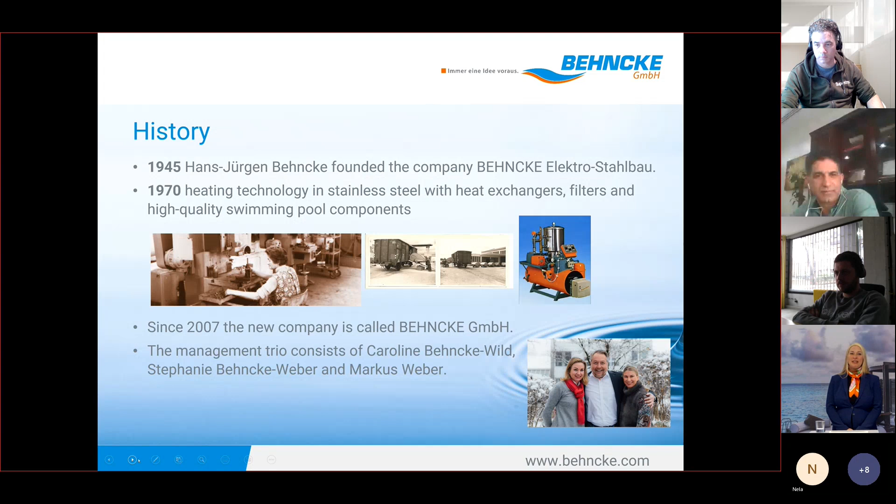We started here, where I'm actually standing in this building, in 1945. You see we have a very long history. In 1970 we started with swimming pool equipment. Nowadays, you see a little photo below of Stephanie. In the middle, well, we have to let some other people in - I think that's why we have that mouse confusion. Please go back one slide. Anyway, I'll make it without the presentation, you just see me. We started in 1970.

At the time we already produced heat exchangers and filters made from stainless steel. There was a photo you just saw of Stephanie, Markus, and Caroline - these are the owners of the company. Caroline is responsible for after sales, Markus is responsible for customer relations, and Stephanie is responsible for prices and human resources. These three together, two families, have six children.

And six children can wait for a very nice new building, which is very much in progress at the moment. We are moving from this place, where I am at the moment, five kilometers away - we are here very close to Munich. All the storage, production, and the office building will be moved, and we are going to open in January 2024. Down below in the office building you can see the training center. You're always very welcome to come visit us, and we run trainings.

It'll be very nice in the new building - we have a pool, everything. Then the 2nd and 3rd floors are offices, and the 4th floor is like a relaxation area where you can actually see the mountainside. So please come visit the new building and get an impression of what we are.

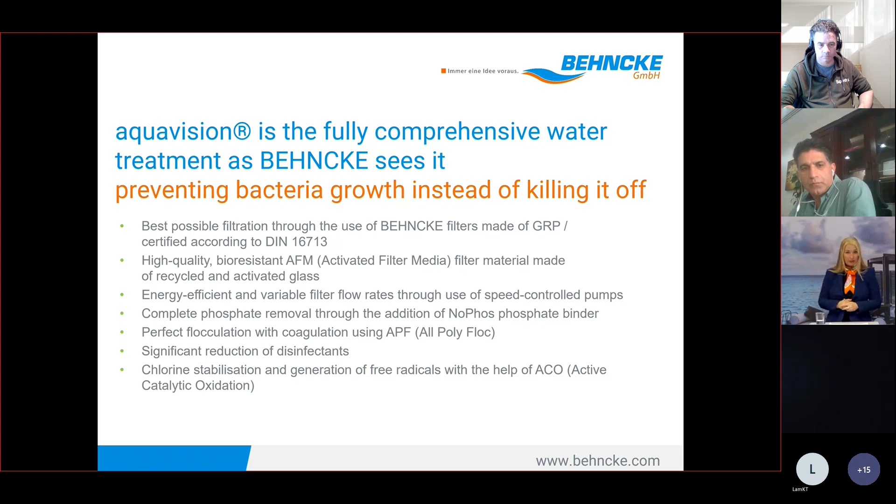And we work with ACO. That means we want the part of chlorine that we need to stay in the pool, not have the sun take everything away. So that is the prevention of bacteria.

Next, we have a pyramid: 60% is done with filtration, flocculation, backwash, and hydraulics. Why is the 60% so important? Because we work on that 60% - if this is very well done, you already have pretty good water.

Of course, you do need some fresh water - this is something we cannot avoid. And here it's only 10%, but nevertheless an important part: maintenance.

Maintenance means you have to take care of your pool. It's not like you can just say, I have a cleaner and that's it. No. I remember my dad, when I was little, we were driving in the car, and he would always say, silence.

And silence meant everybody had to be silent. My dad was quite rough. And then he would say, do you hear the noise? And everybody would say, yeah, maybe a little bit.

We have to find it - this is how we treated a car, and it's only a car. So you really have to treat and maintain your pool, because you're actually going in with your bodies, with your children. It does need maintenance. And 10% chemicals, yes, they are needed, but it's not that we turn the pyramid around and say, we put 60% chemicals and then it will be all right. This is not how we work, and this is the basis of what we do.

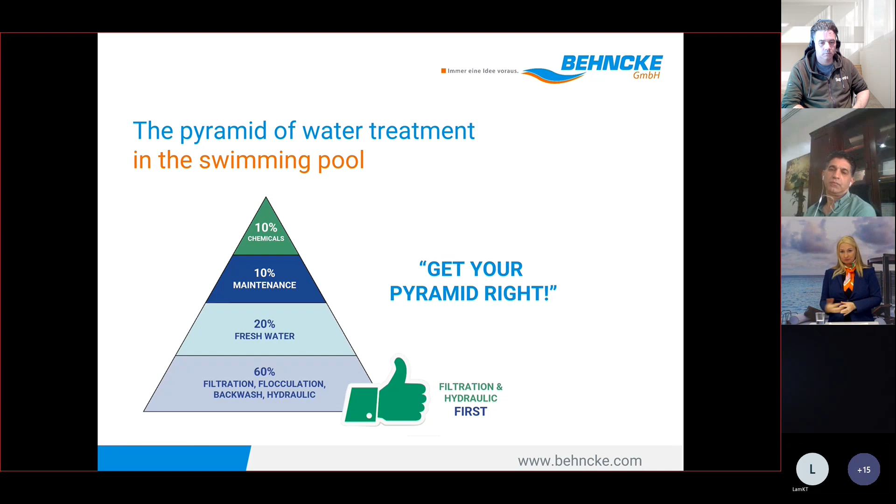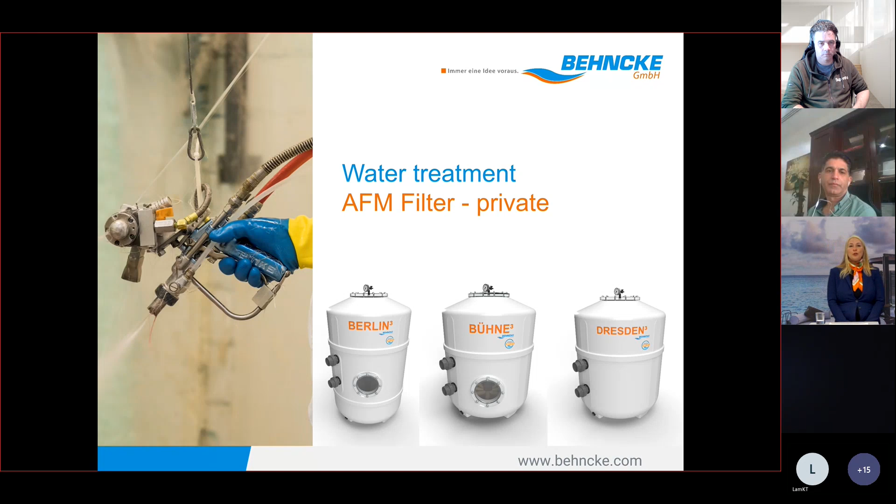So we come first to the filters. We have a new filter series: Berlin, Bühne, and Dresden. I would like to show you this. But first, I would like to show you a video from the production site, which is, as I said, in the center of Germany. I really want to give you a good inside view of how we manufacture our filters.

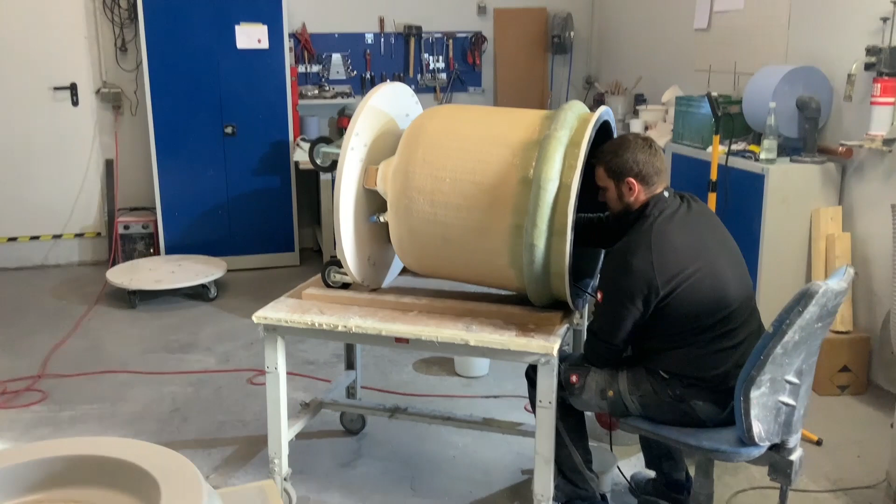Come on, let's start. Now we are in the mold making area. The life cycle of every pressure vessel begins in this small area. Up to 4 employees are responsible for the maintenance of the molds, but they are also responsible for building new models with improved properties and adjusting models according to customer requirements.

The individual filter components are manufactured using various methods, such as fiberglass spraying. However, wrapping or hand lamination is also used, depending on the container type and requirements. Fiber spraying, as shown here, is carried out exclusively by trained employees with many years of experience.

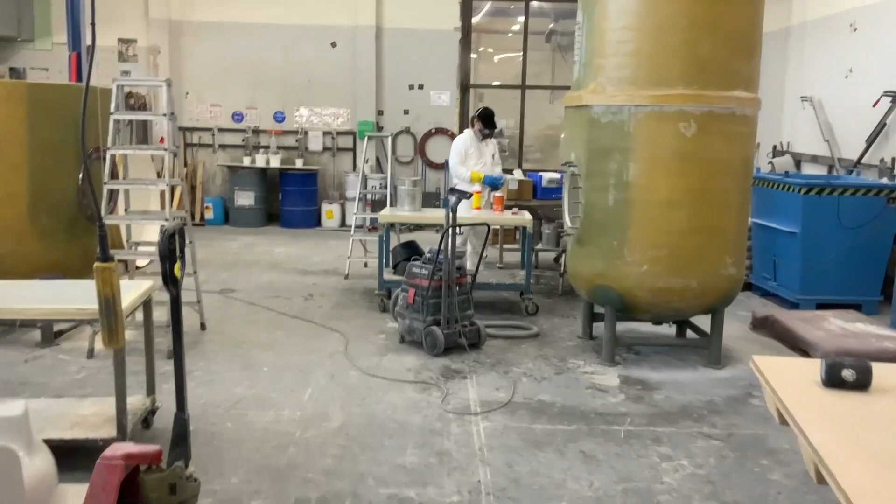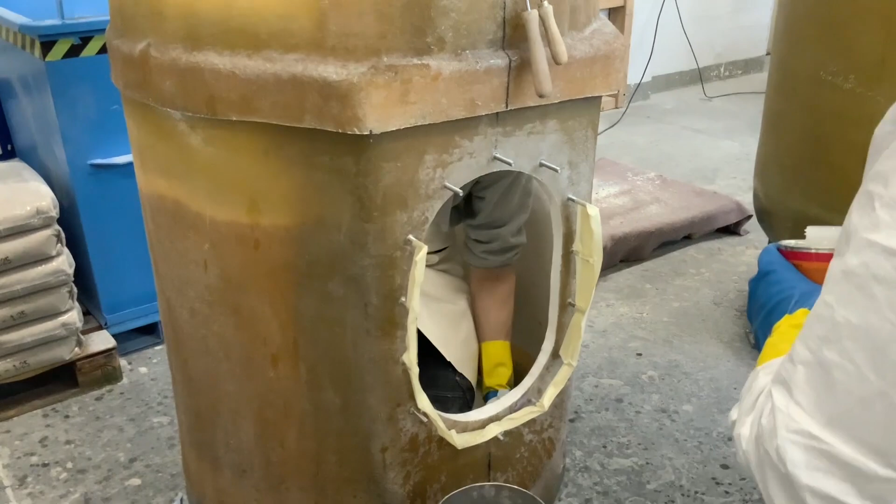Here we see the filters that are made for use in public pools or process water treatment. These exceptional filters are manufactured up to 3 meters in diameter, 4 meters in height, and 10 bar pressure resistance. Many extensions are integrated on customers' request. A split delivery and assembly is also possible and realized by our own employees.

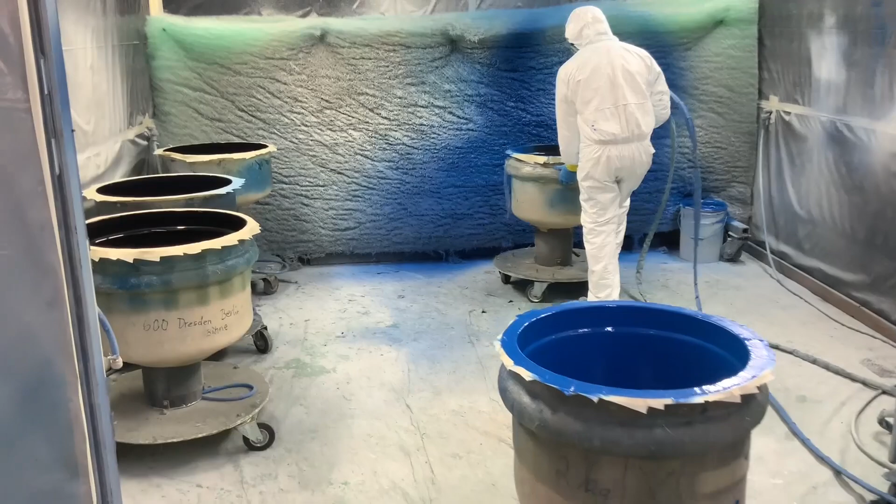Now we are at the start of the manufacturing process of the private filters. First, the colored gel coat is sprayed into the molds according to the customer's requirements. Then they come to tempering in a drying room. After drying, they have to be trimmed and pushed to the next process step, the fiber spraying. With the help of modern production methods, there is a possibility to manufacture 100 parts per day.

Even in private pools, more and more emphasis is being placed on performance. So some filters are equipped with a third component, we call it the jacket. This significantly improves the filter bed and smooths the filtration.

Unfortunately, producing the cylinders is also the most difficult of all manual activities. In order to achieve our high quality goals, additional reinforcements are modeled at the critical points. This is one of the reasons for the longevity of our filters.

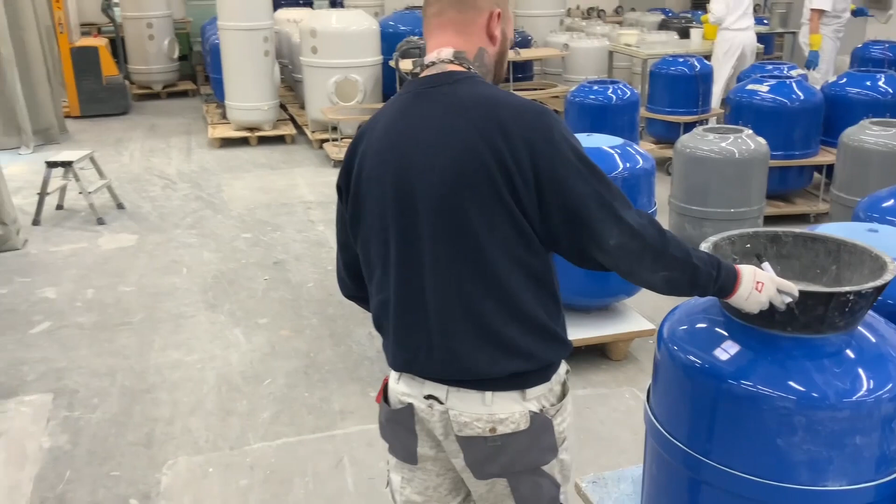In order to manufacture as efficiently as possible, the already prefabricated raw parts are taken from the assembly warehouse and pushed to the next step. Now, the individual components are connected to each other with a strong laminate.

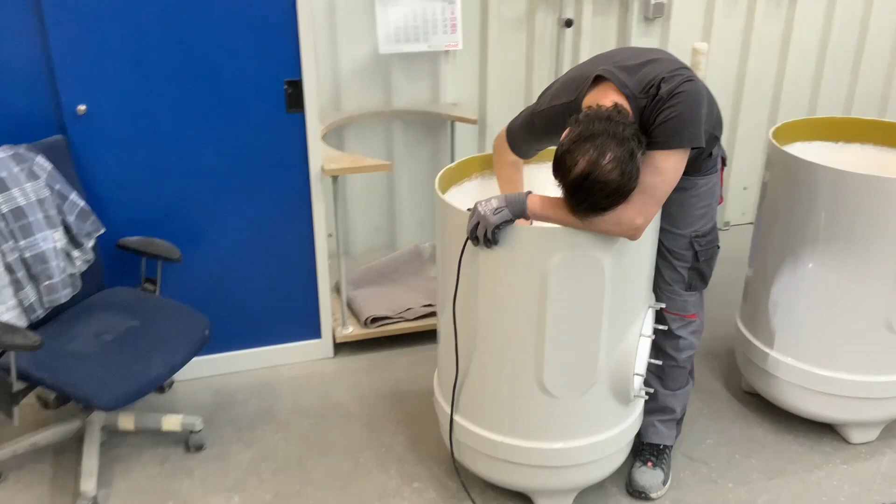That's what we call the wedding. Here, in just a few steps, a single component becomes a container. After the laminate has been vented, a protective layer is applied, which represents an additional barrier against chemicals or aggressive substances. Next step, the assembly department.

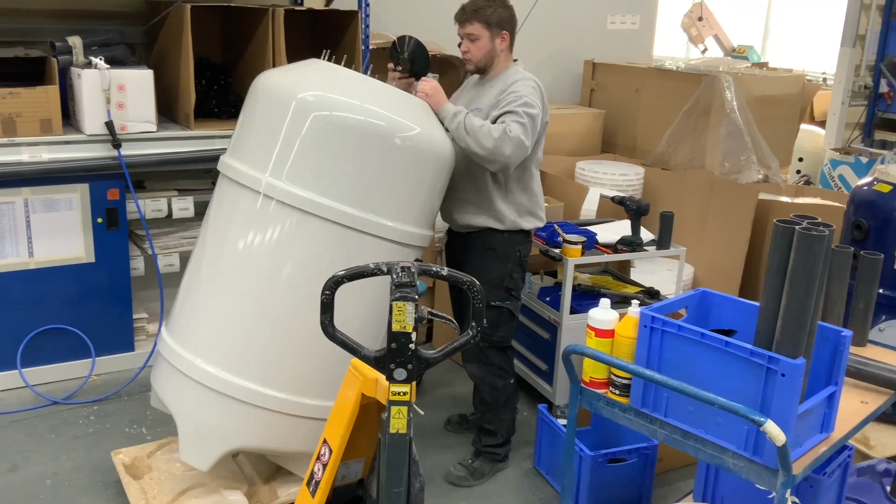Now, containers become filters. Depending on the type of filter, filter fingers or filter nozzles, connections and sight glasses are fitted. The rest of the pipeline is also installed here. Once the filter has been assembled, a valve and a pump are assembled into a filter system, depending on the customer's order.

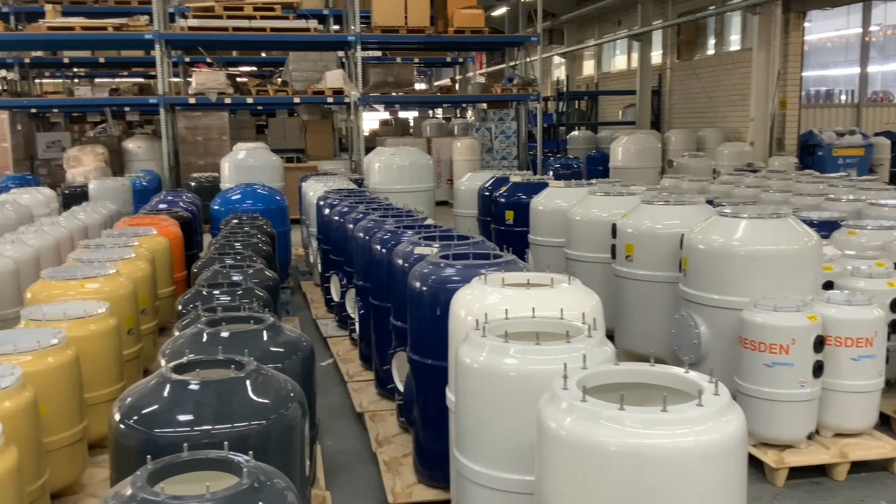Before we end, there's a little look at the site here. A production site which in its long history has increasingly developed into the market leader for quality products. A company that values health, sustainability and effectiveness. An organization for which a common, familiar and mutually respectful togetherness is important. We are all that, and we are all BEHNCKE. High quality products made in Germany.

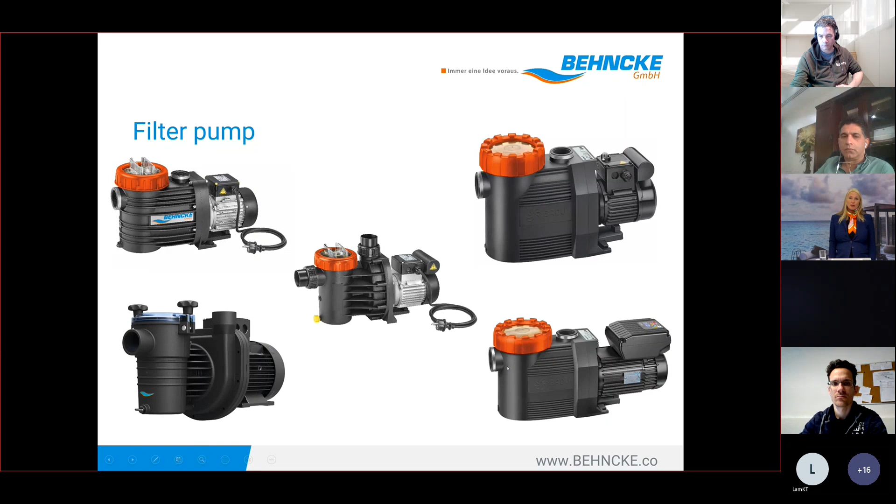So please use a speed control pump. And if you already do that, then also use a flow meter. It's like the same as the car thing - you're driving your car, you don't know how fast you're going, it's never recommended. It's the same in a pool. It's good to have a flow meter to know what the flow really is in the system. It's not very expensive, so you can add it and already have very good control of what is happening.

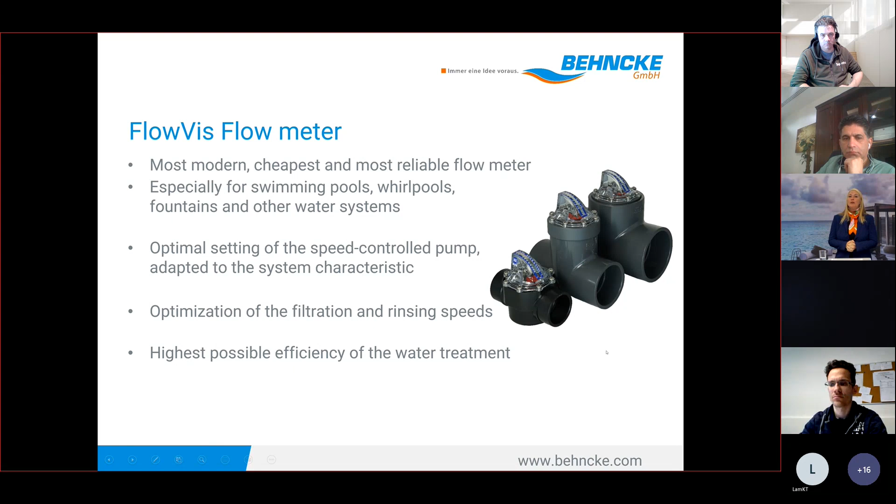We adapt from nature. We work with different layers of filter material in the filter, so the water really goes through, like in nature, to different layers, and they have super clean groundwater, ideally. That's what we adapt from nature in the filter. We go through different layers of our grains, so we get very pure water out of this.

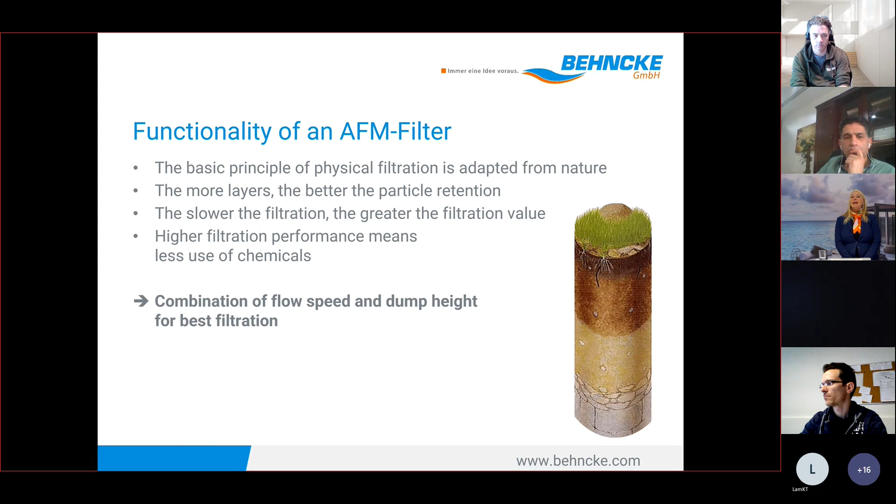Again, here you see it. The filter is not a balloon, it's not a ball, it is quite high. This is where all the filtration really happens, in all of those, on the inside. This is very, very important.

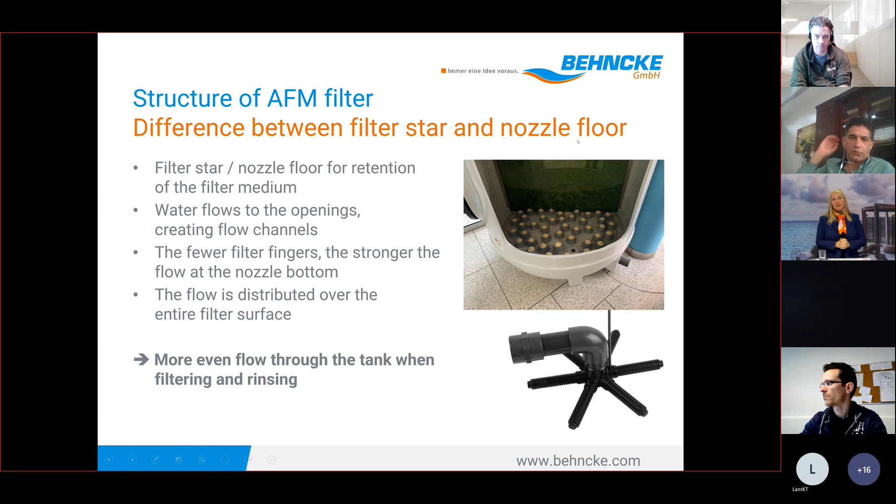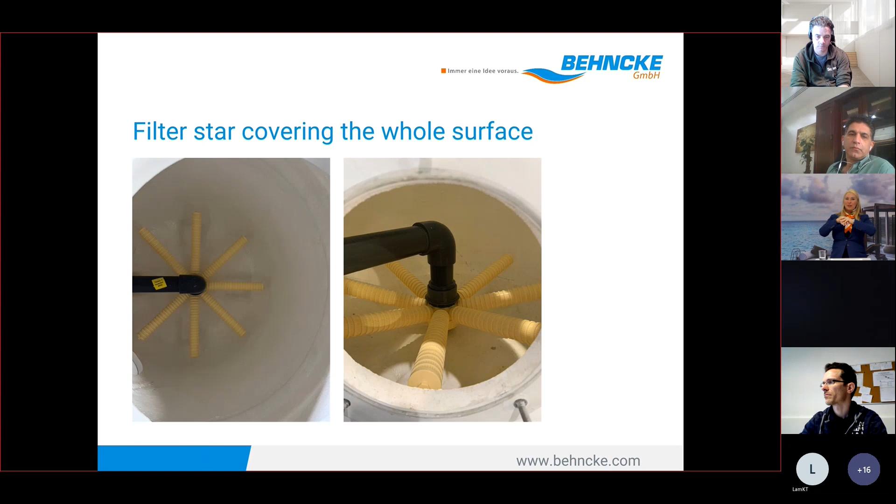Here I took a photo the other day when I was in the factory, and you really see it's covered all the surface, also with the laterals. Because we have a new series, I'll show you, they are quite big and they also cover all the surface.

Here's another inside view of the filter, that's what it looks like. This is the new series we are offering for very big private pools, or if possible for smaller public pools, from 920 or 970 dimension. We have for all of Berlin, Bühne and Dresden, we are offering this new series now.

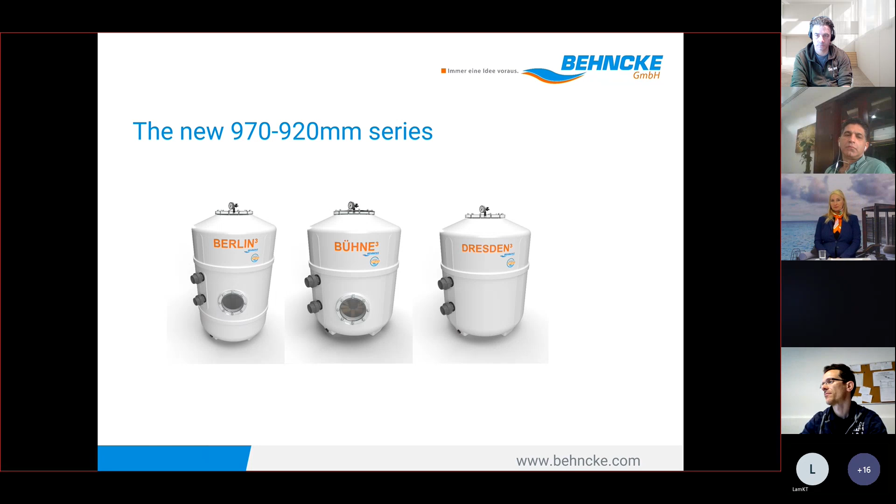What makes our filters different is that we have that very large opening of the very thick acrylic lid, a very big opening. You see the empty is down on the foot and not somewhere else. You can really see inside of the filter, with the side glass also, what is going on.

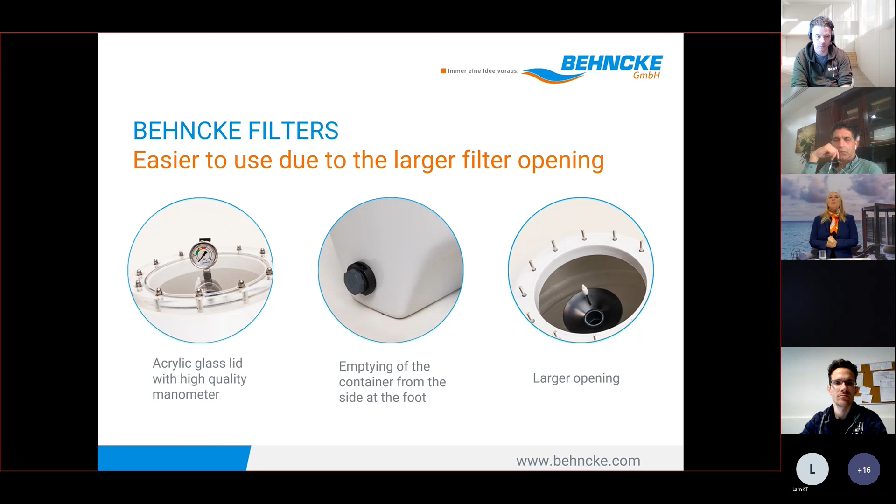It's like grocery shopping once a week. You pay a little bit more for a filter if you take a little bit bigger filter than you maybe need for the pool, but you definitely have much, much better filtration and cleaner water. So it makes sense to spend a little bit more money to buy a bigger filter.

Here we made a test. We always test our filters. I just want to show you what happens when we take 5 bar for a 2.5 bar filter, when we push it to really strong, a lot of bar, and what will actually happen with the filter.

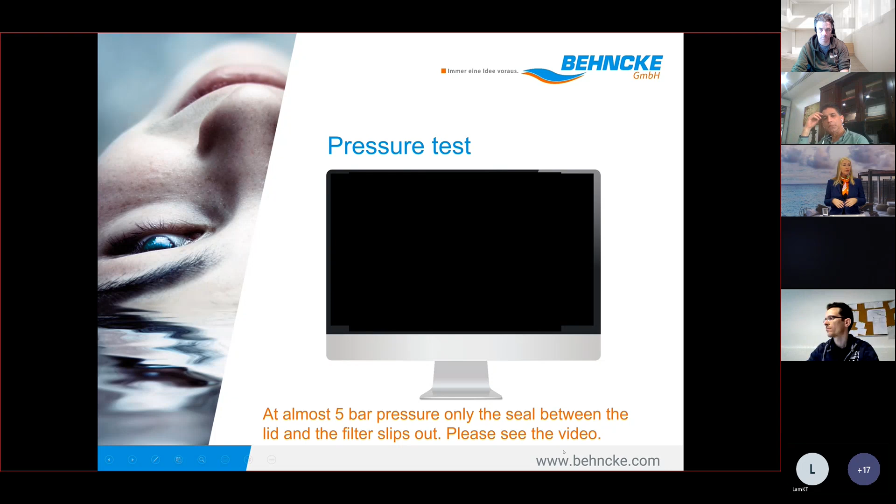This is what happens when we take it to 5 bar. That's basically all. You could think the filter would fail everywhere, but it's not happening. So this is for a 2.5 bar filter.

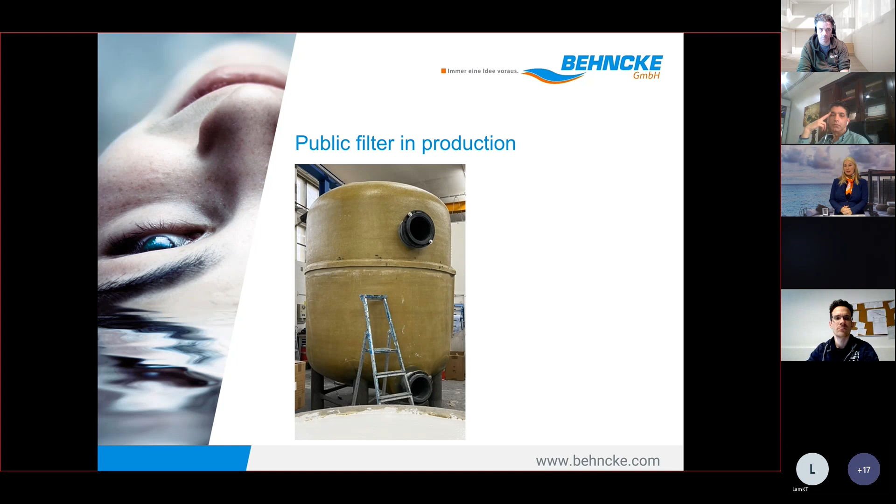Why a BEHNCKE filter? I'm not even talking about quality, this is something what we stand for.

We have a long engineering knowledge, short transportation ways here in Europe. We work according to the European norm and the DIN in Germany. Normally the filters are 2.5 bar, but we can go for the public filters also for a higher bar. We have that big acrylic lid, that big opening. We have an internal extra coating against chemicals. We can take it up to 40 degrees.

We have technical service, they can also travel and come to see you if there's anything. We offer workshops, you can be trained. As you know, BEHNCKE, we have 2 factories. So just in case, the other day I had a customer who said, oh, I might as well buy something else from you because you have it. So we are offering many different product groups.

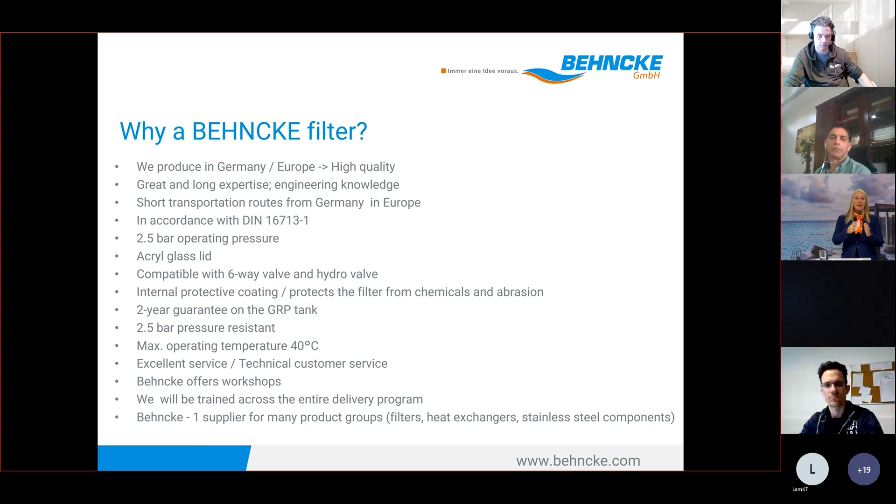And here's another video for the filter material we are using, and we are very happy with it because it's bioresistant. Have you ever wondered how bacteria survive in a swimming pool, and why the sand in your sand filter needs to be replaced every 3 to 5 years?

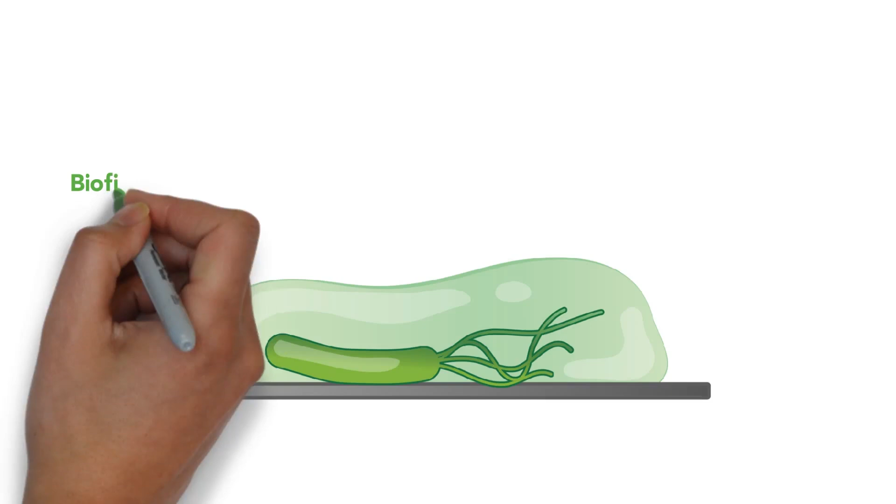The main problem with sand, crushed glass, and other filtration media is biofilm, a slimy, acidic substance formed by bacteria in your filter that protects them from oxidants, inside which bacteria can grow and multiply quickly. After only 6 to 12 months, biofilm starts forming clumps, leading to the formation of channels in the filter bed. With time, filtration performance becomes inconsistent and unreliable, allowing unfiltered water and bacteria to enter the pool while increasing operating costs and water turbidity.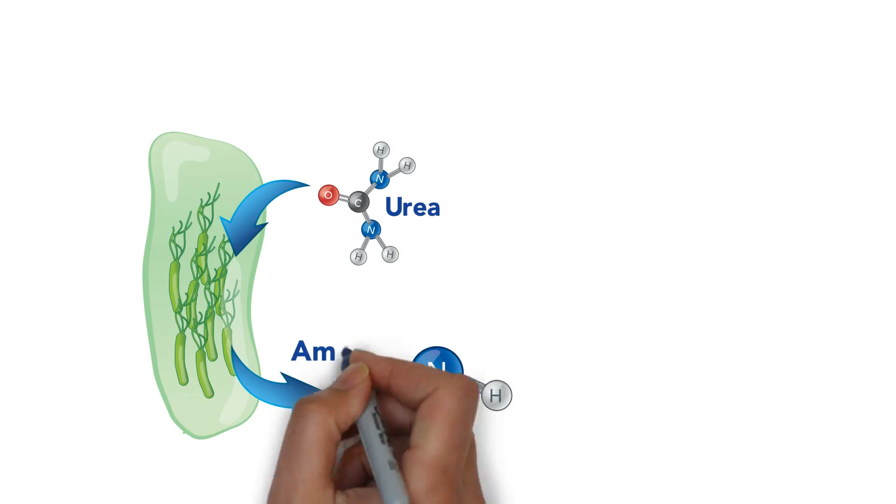Unfortunately, biofilm also creates serious health hazards, as bacteria in the biofilm generate ammonia, which reacts with chlorine to form harmful disinfection byproducts. These byproducts are responsible for the unpleasant chlorine smell, causing eye, skin, and lung irritation. They are not good for you, and especially not for children.

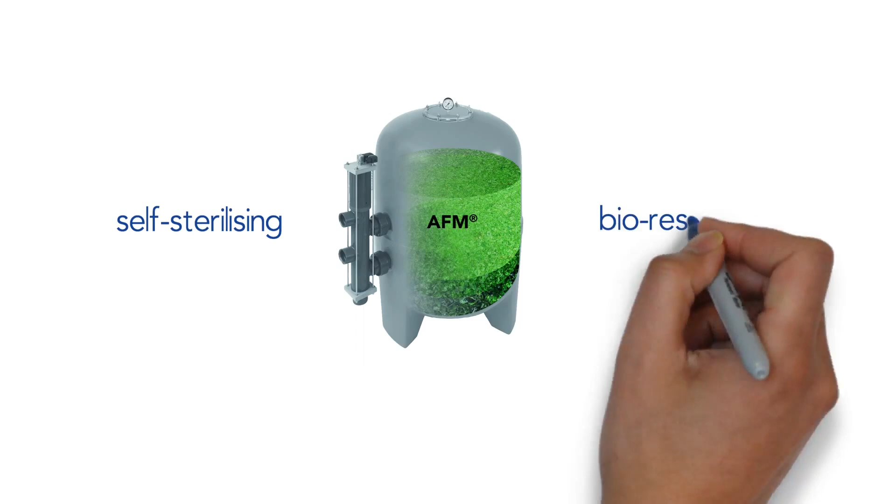But is it possible to get safer, clearer water and healthier air conditions with the same sand filter you've been using for years? It's more than possible with AFM Activated Filter Media by Dryden Aqua. AFM is a self-sterilizing and fully bioresistant filter media made from recycled green and brown glass that replaces sand in any type of sand filter.

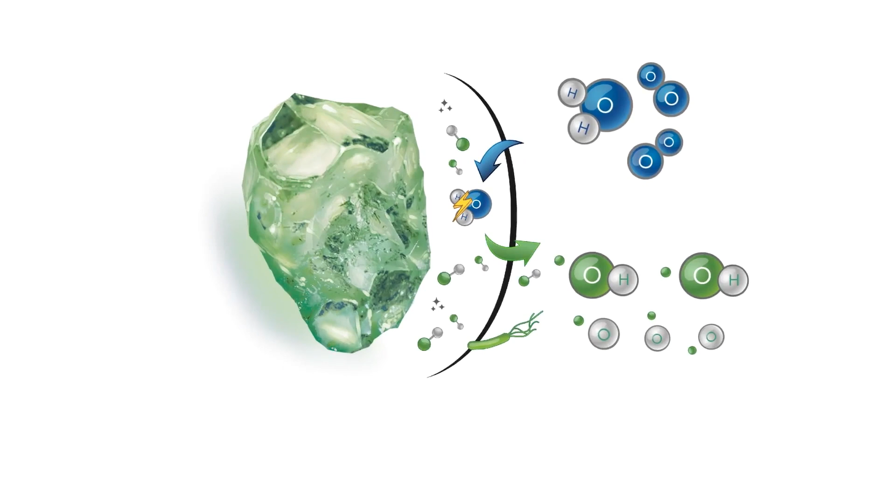AFM gets its self-sterilizing properties from free radicals formed on the surface of the grains when water flows through the filter. This renders the formation of biofilm impossible, making AFM the only 100% bioresistant filter media on the market.

What's more, our patented activation process modifies the charge of the glass and strongly increases its surface area to give AFM unique filtration properties. With a certified 4-micron filtration, AFM surpasses the performance of sand and other glass filter media to provide exceptional water clarity and lower chemical consumption.

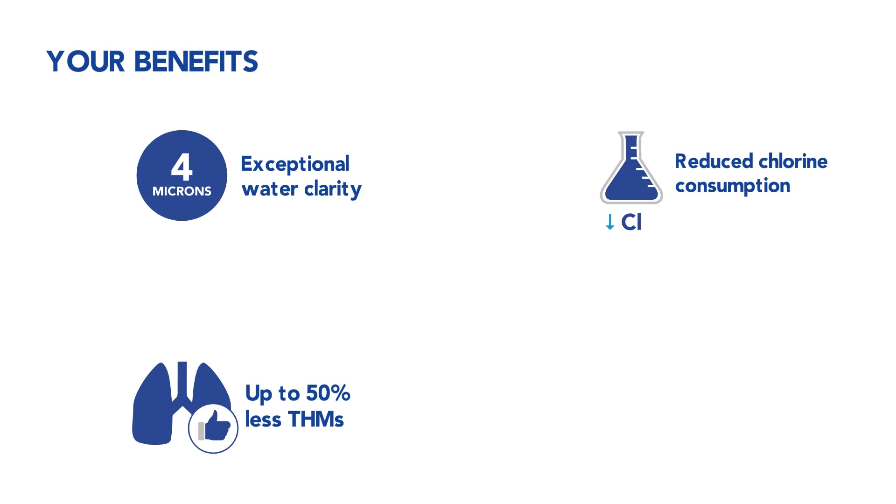The activation of the glass also enables AFM to reduce the formation of harmful THMs by up to 50%, while providing substantial backwash water savings for a quick return on investment.

Extensively tested and certified, AFM outlasts all other filter media and is the only glass filter media certified for pools and drinking water applications. Enjoy clean and healthy water for years to come with AFM Activated Filter Media.

Thank you. And then here I have a little tool, because you actually don't want to find all your filter material on the ground or somewhere else. You really want to see it in the filter. And there we have a little tool which is really super useful to help keep all material very clean and get it into the filter.

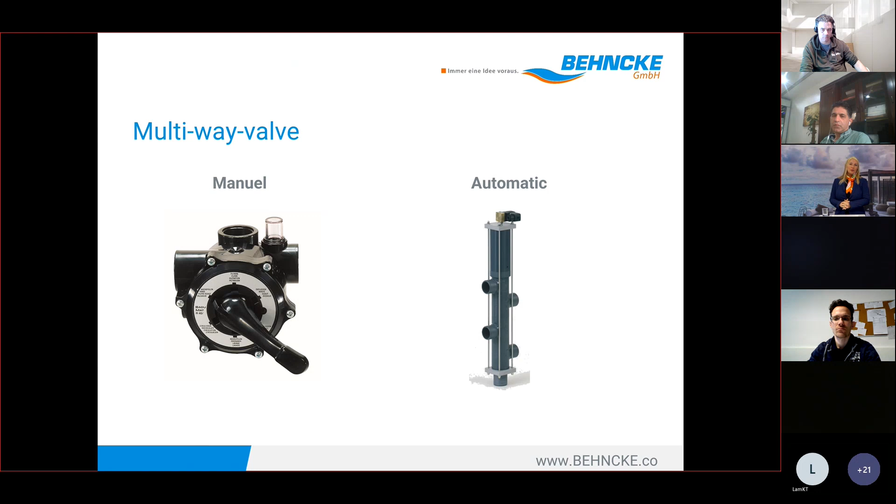Yeah, and for the filter, of course, you need a valve. Both manual and automatic are possible. We have a lot of customers who use manual, but nevertheless, here in Germany, we usually use automatic valves. Both are possible and adaptable for our filters, and of course there are different sizes, different versions, and also for rinsing we have the 3-way valve as well.

So this is the part of the filter, and now I would like to come to where I'm actually here. This is the stainless steel production where we make all the inbuilt parts and the heat exchangers. We have a very, very wide range of inbuilt parts, and this is because we always adapt the inbuilt part to the type of pool. So if you have a stainless steel pool or a liner, we will choose the right product for that kind of pool. That's why we also have a very wide range of different inbuilt parts.

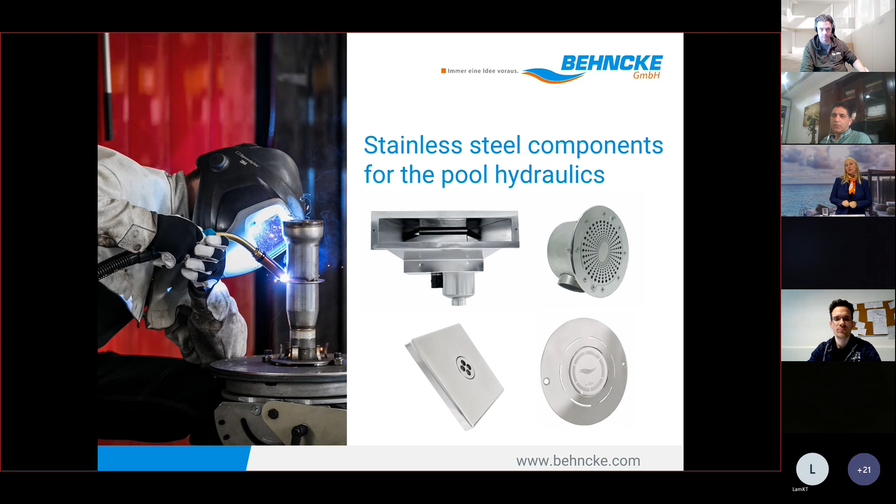And here, yeah, I just like that, I'm a woman. Shine, shine, shine, I call it. I just took a photo the other day at a fair, and I thought, oh yeah, I don't need a mirror anymore. If you work for a company that produces stainless steel, then you don't need a mirror. And this is how shiny it is.

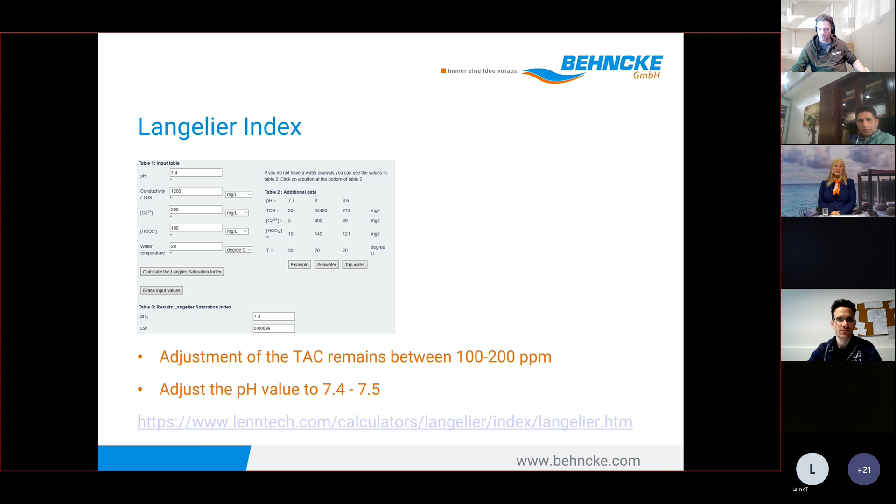Stainless steel is complicated, you say, but plastic will also rot over time. Please have a look at the website for the Langelier Index. If you have your parameters aligned - the right pH, conductivity, alkalinity, temperature - it is what it is. If you're within minus 0.4 and plus 0.4, your water is very good and there's no problem with stainless steel at all. It needs a bit of education of the end customer, but we do recommend looking at this Langelier Index.

We have a wide range of nozzle skimmers with different holes in the nozzles. We calculate everything. Also very important, we customize. If you like a product you've seen, even if it's a customized product for a customer, we will definitely try to do it. Please send us a drawing or a sample and we'll try to make it happen.

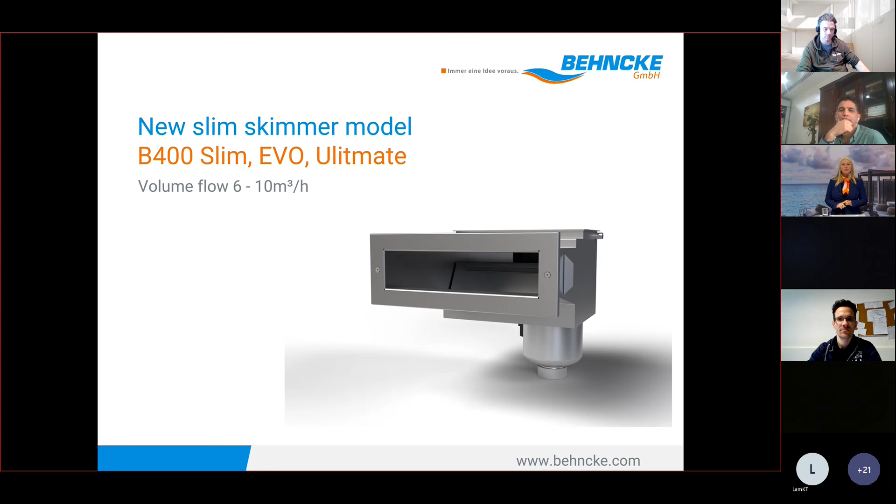Different skimmers - very popular at the moment are the slim skimmers. We have different sizes, and here's a new version, the slim skimmer B400. It's a bit for smaller pools, because we see some pools getting smaller. People like to sit around a pool but not be super active. We have it as Slim, Evo, and Ultimate - three versions of the smaller slim skimmer.

Evo means we take the basket out from the front, because some people want it super nice with stones all around, so you have the possibility to take the basket out the front. Here we have the Ultimate, where the water level is pretty high - people like that feeling of an infinity pool.

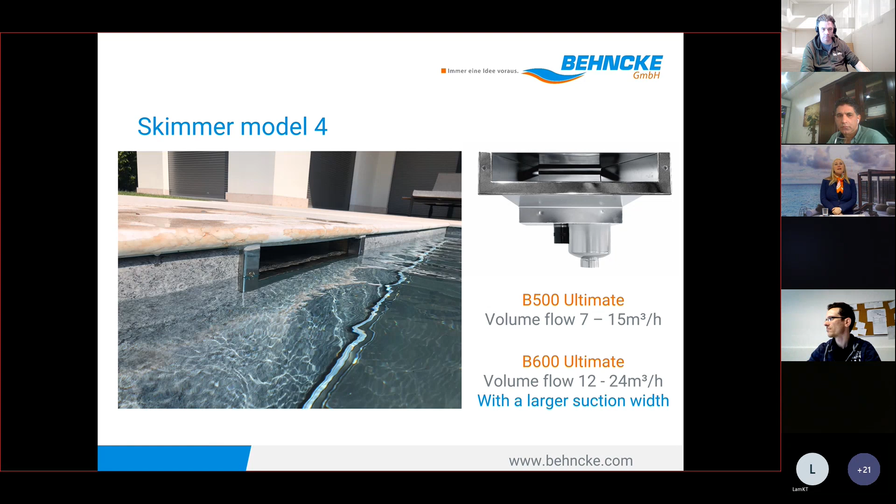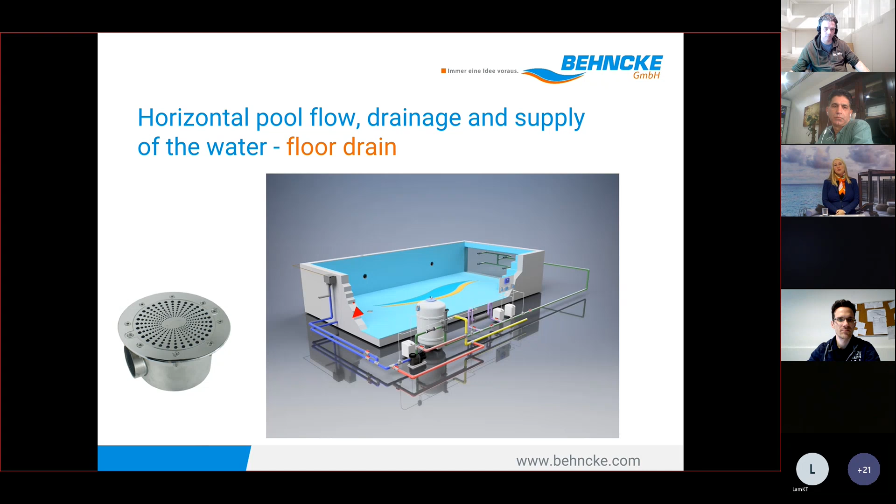We also love our floor drain because it's super nice and shiny, and it's really in the floor - you're not stepping on something wondering what it is. It's really flat into the pool and looks very neat. We can also put your own logo on it.

For positioning of the inlets, I don't know how you do it, but we do recommend it as an anchor system - that's what we recommend for the nozzles and also for the skimmers.

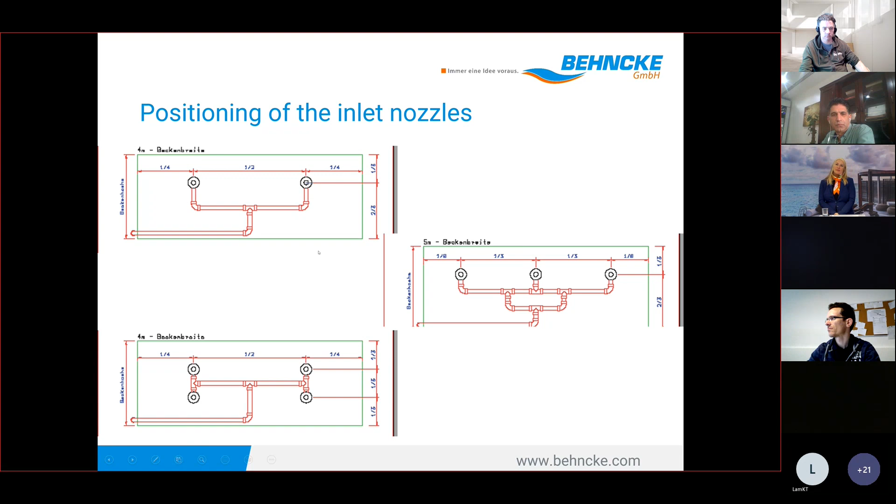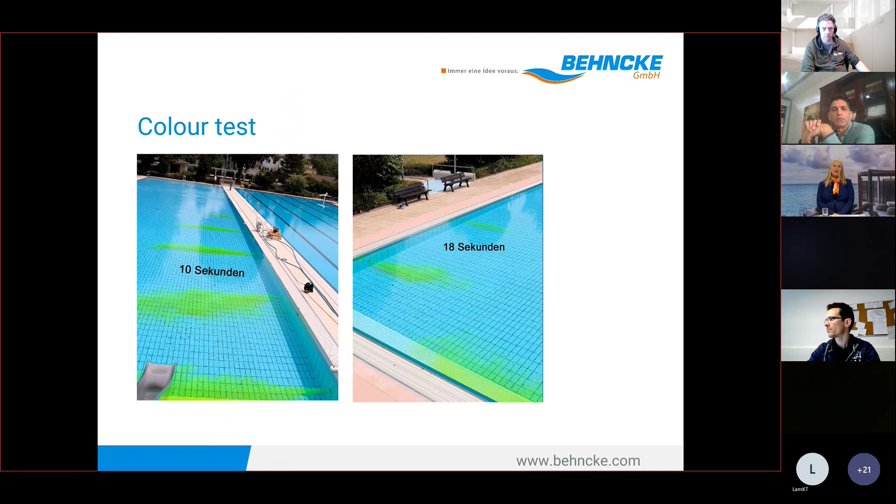Now we're coming to the next one. We also offer attractions like swimming pool lights. We have a new light called the BEHNCKE LED. It's similar to what we had before, but a little more economical. We're offering it in 25, 40 or 50 watt, in mono or color.

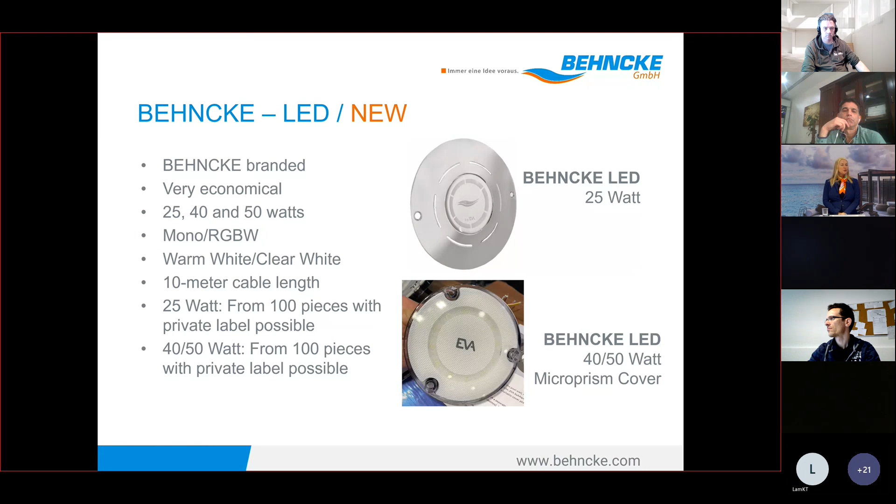And if you want to buy 100 units, you can even have your own logo. We still give 4 years of warranty.

In the next slide, you can see the very good result when you use our lights.

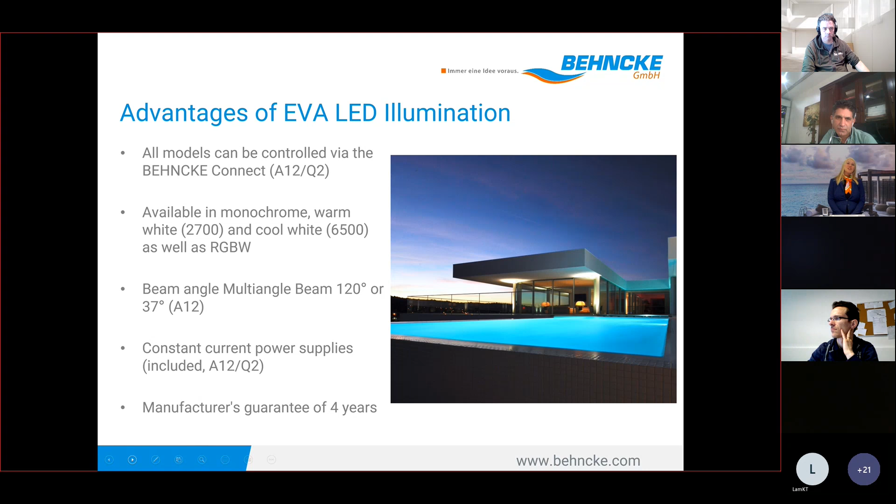We do offer some parts, like the junction box, the cover, the inbuilt parts for the lights. This is something we manufacture, and the light itself we buy from EVA.

This is how we operate the pool. There are different ways how we can control the lights.

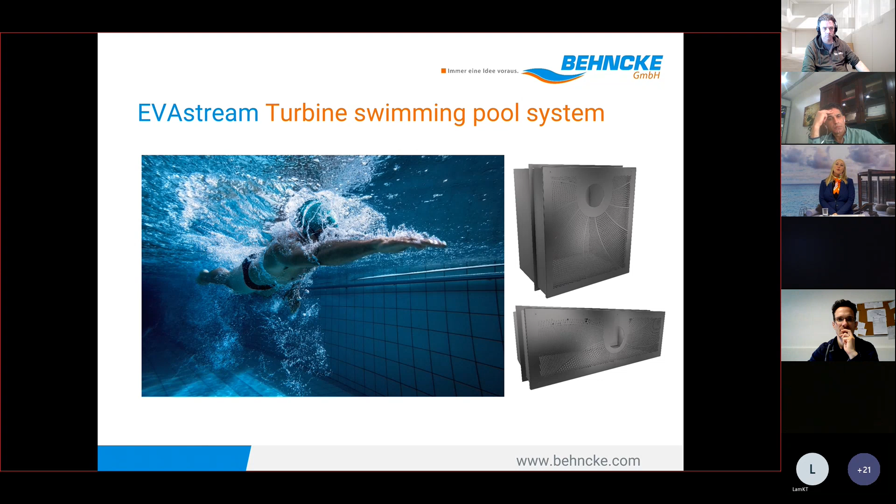Coming to some more attractions, we also have a shower, which is super neat, and a counter-current system, again in a square or rectangle version. Here's a little movie where you can see how it really works in action.

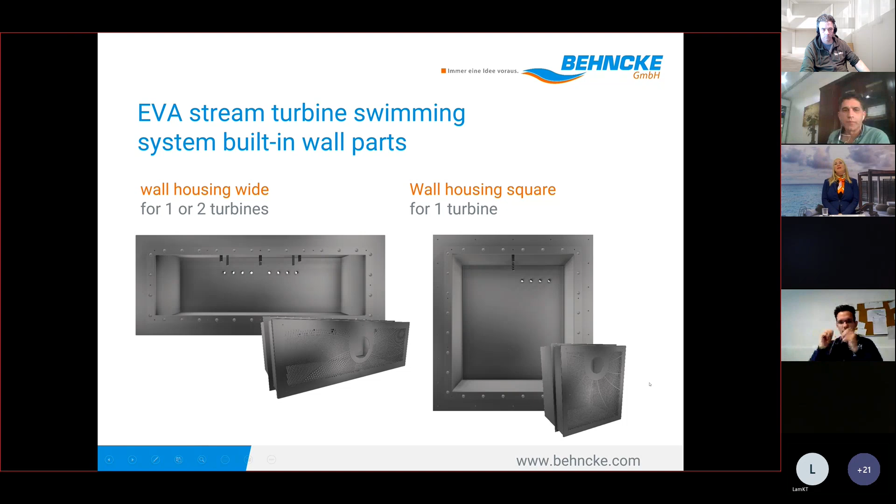As I said, we have two versions for the niche and also for the faceplate. Here you can have a look inside. Inside, we also have an extra nozzle to move the water, because we do not want dead zones. Then we have different options for the turbine.

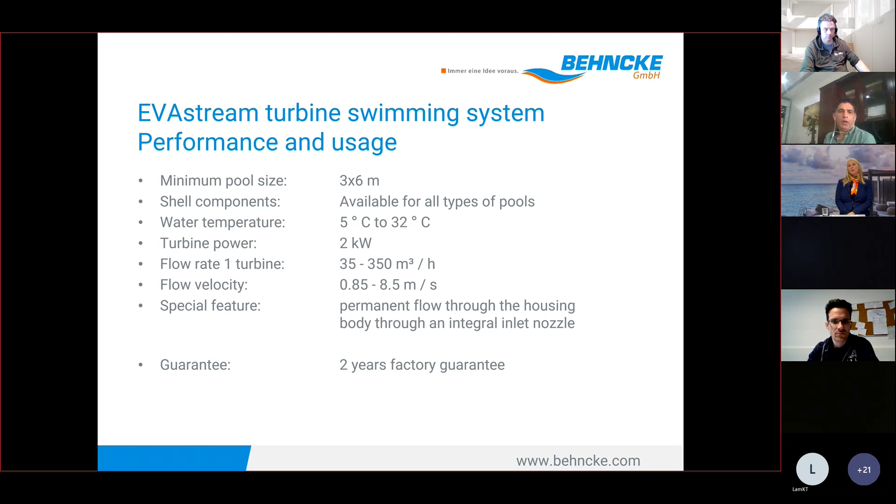It's also possible to have two turbines, for a very strong version. We have different ways to operate the counter-current system, either from the cover or with a piezo button. And there you can see, with different colors, how fast it is going.

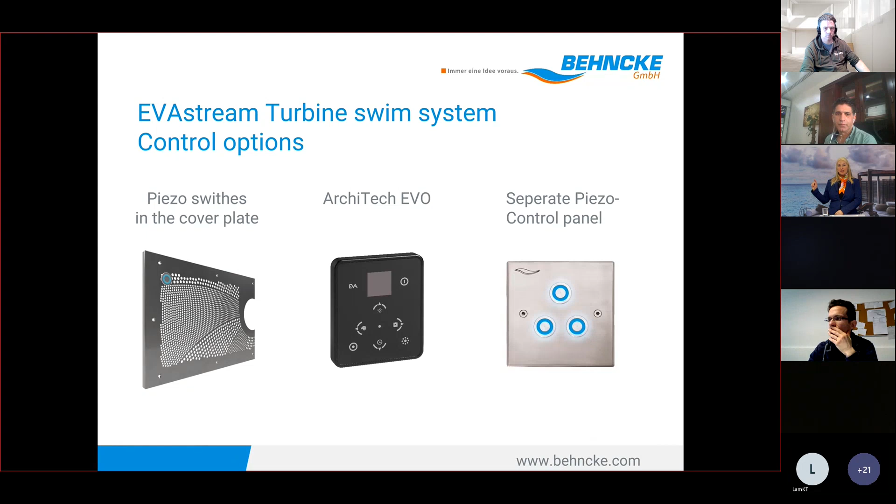Now we come to the next topic, very short. As I mentioned, we make heat exchangers, a product we have been making for over 50 years.

The other day at a fair, a young man showed a photo of a heat exchanger from Elektrostahlbau, from very early on. He said, 'Look, this is from my grandfather.' We were like, wow, this is 40, 50 years old. Then he said, 'It's still working.' We were like, wow.

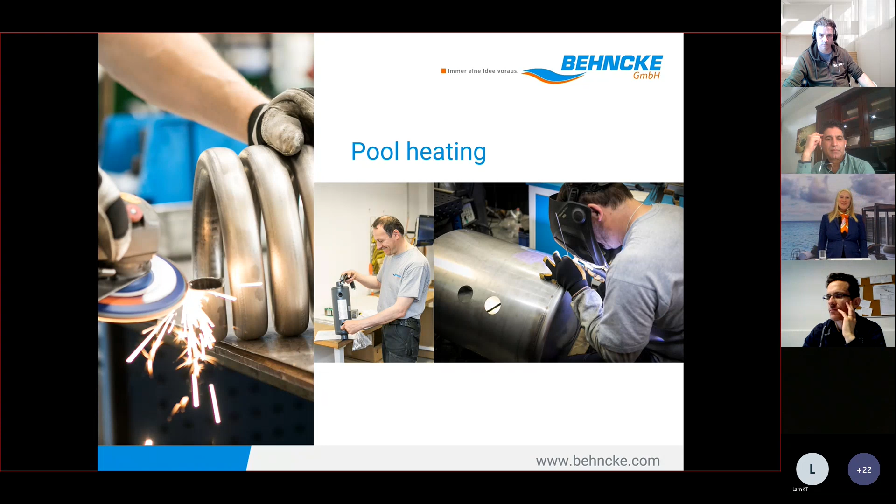We have many different versions. Like yesterday a customer said, 'Wow, that's overwhelming.' So we have options for different entry temperatures, and we can also offer titanium.

We also have electric heat exchangers. So please have a look in the catalog, there's a very wide range of possibilities.

Coming to the new product, swimming pool control, and you might say, 'Oh, artificial intelligence.' Maybe, but your kids will definitely ask, 'Why don't you have it yet?' It's the way to go. It's what it is, whether we like it or not, but it's the modern world, and it has a lot of advantages, protecting the environment and saving cost.

You might ask, how is that possible? Because this system has two apps for the installer and one app for the end customer. You can control so many features, it's mind-blowing, really. But let's keep it to the shorter, more basic points for now.

It has a feature, for example, if you want to save water, which is a big issue. It's connected to the weather forecast, and it knows, say, in 2 days it's going to rain, so it will automatically wait 2 days before doing the backwash. Or, for example, if you need a refill and it knows rain is coming in 2 days, like it was in Barcelona recently, it won't automatically do the filling of the pool.

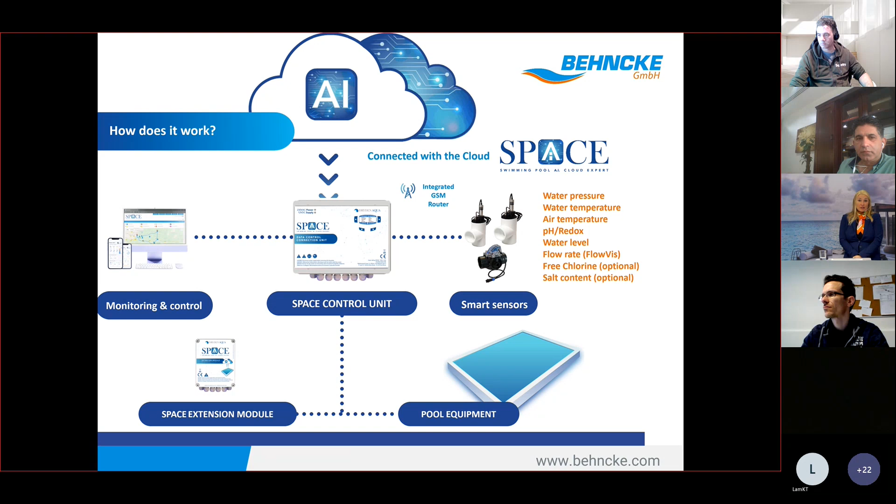It will detect any leakage, any clogging, any failure in the electrical system, any failure really, and it automatically gives a note: oh, there's something wrong in the system. So you have a very controlled system for you as the end customer and as the installer, and you'll already be notified that something is wrong in this pool, so you have to do something. Which I personally think is super neat.

It also reacts over time, it's self-learning. Over time it will become more and more complete, and it will know, oh, at that time of year there's always sunset and sunrise, and automatically the light switches on and off. So it also operates all the attractions, the pool cover, or later on the salt chlorination system - this system operates the whole pool.

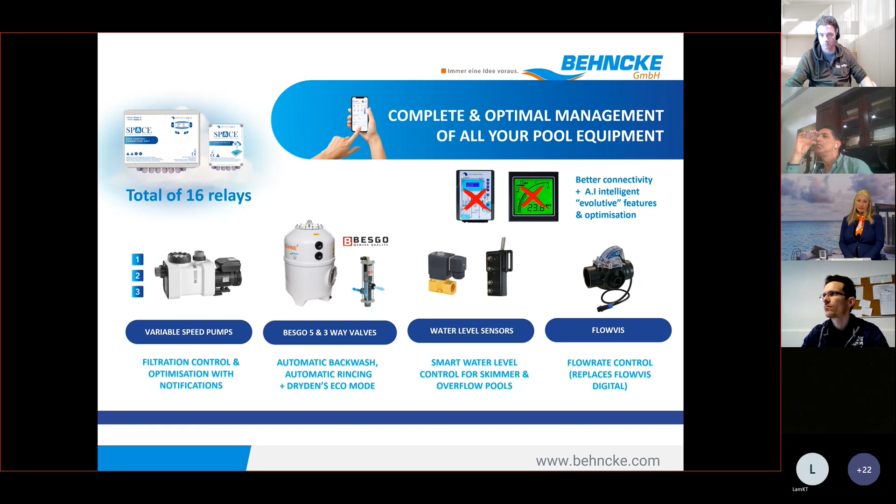And of course, also what we've talked about, the speed control pump, the filter, the flow meter, and you can also have extra relays, and an electrical meter to see what the actual electricity consumption is. You can operate the attractions, the disinfection system, all the things which are needed.

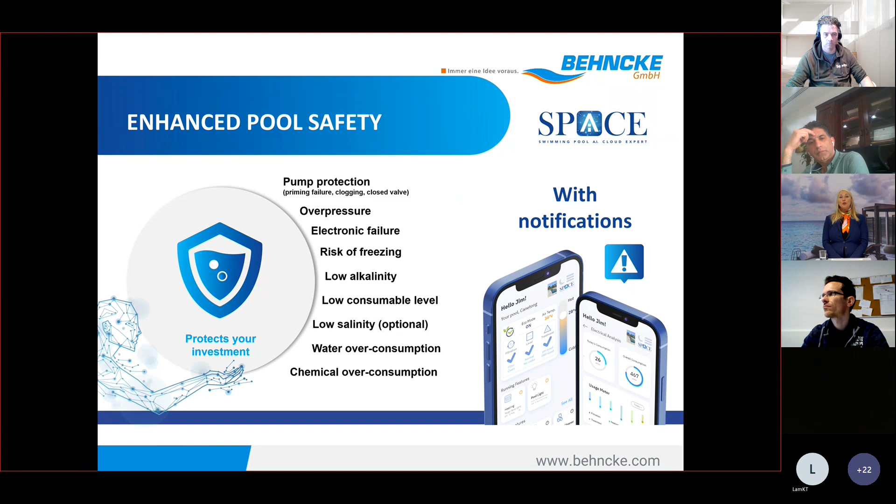Here's the energy meter, which you can adapt. As I said, you have two options for the app, for the end customer and for yourself. So it detects overpressure, as I said - it's just a summary - like low salinity, water overconsumption. This system really detects everything.

And how does it notify? You will see a red little drop. Then, as an installer, I really have to pass by. And you can plan with this tool the tour, and see, oh, I have to pass by at that one.

And maybe I call the other customers when I see something like the pH is not right, for example. The tool automatically calls the end customer and says, I really have to pass by your pool, there's something not right. And maybe the end customer at this moment thinks, oh you are right, I didn't know yet, I haven't seen it yet. That's so great, you call me and let me know, and you come by - you're just the greatest, because you have very good control.

And also there's data recording, so you really have a history of this pool. That means, say today's the 2nd of March 2023 - last year on the 2nd of March, you can look at what has been done, what maybe hasn't been done to the pool. And you can also see if the pool was always treated right, because you have a complete record.

And here you see the guys going to visit the end customer. He thinks you are super great because you were very fast and detected a problem in your pool. So we are offering this in different versions - you can see in the catalog we have different versions, and we also offer our cover.

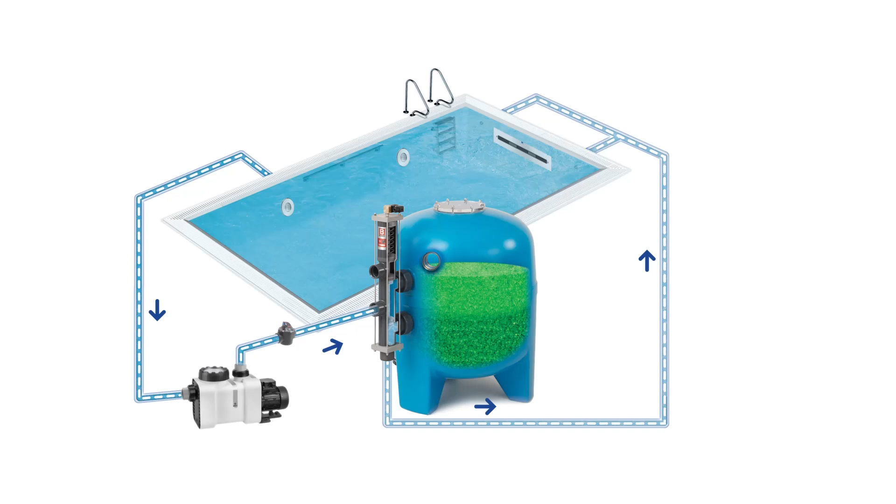To make swimming pools of the future smarter and more environmentally friendly, Dryden Aqua has developed Space, a unique pool management system powered by artificial intelligence. Connected to the cloud, Space is a self-learning, autonomous system that analyzes and processes your swimming pool data using complex algorithms to continuously improve its own performance, reduce operating costs, and eliminate waste.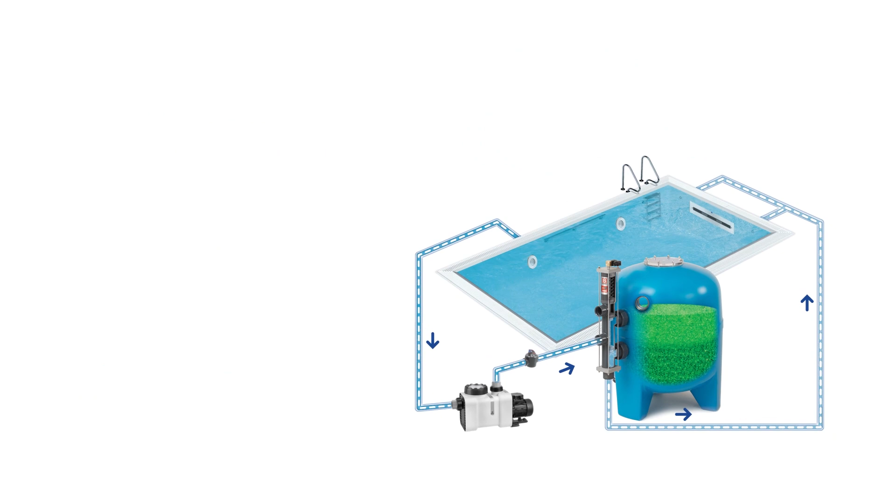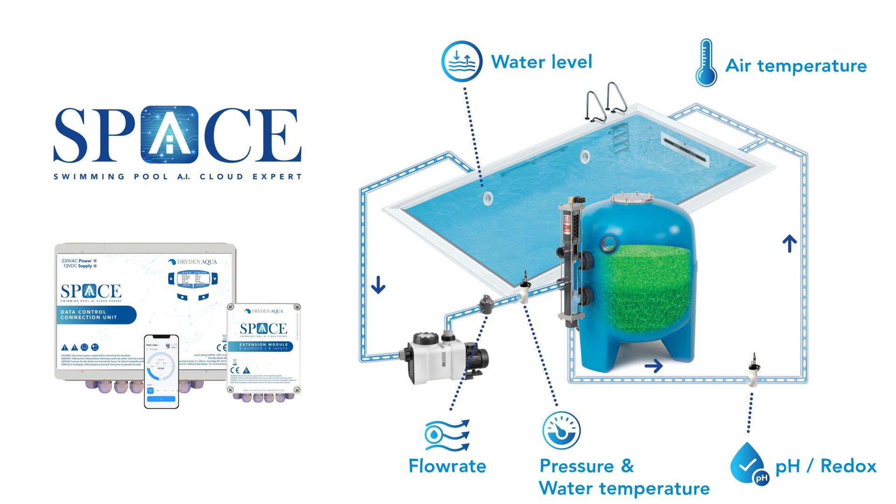To make this possible, the system is equipped with next-generation connected sensors offering the highest levels of accuracy. Space can not only measure your pool's water balance and disinfection, but also analyze its flow rate, pressure, temperature, water level, and more. Combined with artificial intelligence, this technology allows Space to control all your swimming pool equipment in the most efficient and sustainable way.

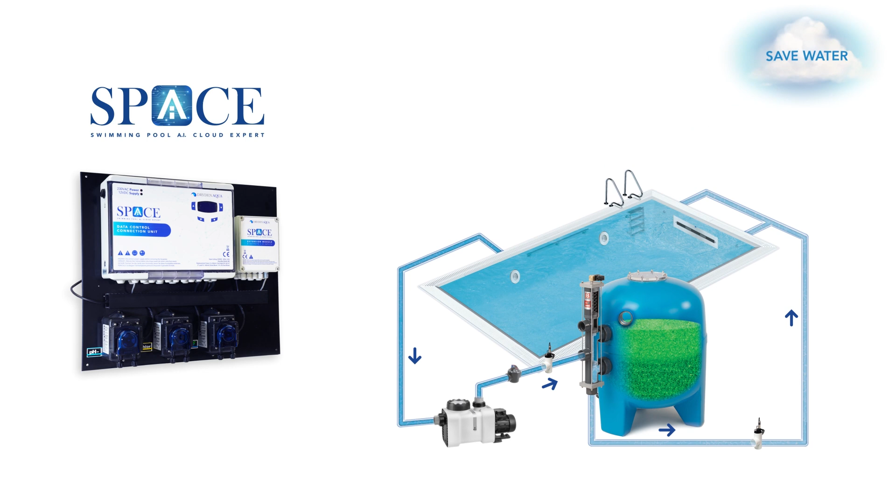To save water, Space will, for instance, in the event of rainfall, use the excess water for your weekly filter backwash, optimize your backwash time according to your filter pressure, and immediately detect a leak in your system to avoid any water overconsumption. To save energy, Space can regulate your filtration times and speeds to achieve turnover requirements with minimal pressure drop and power consumption.

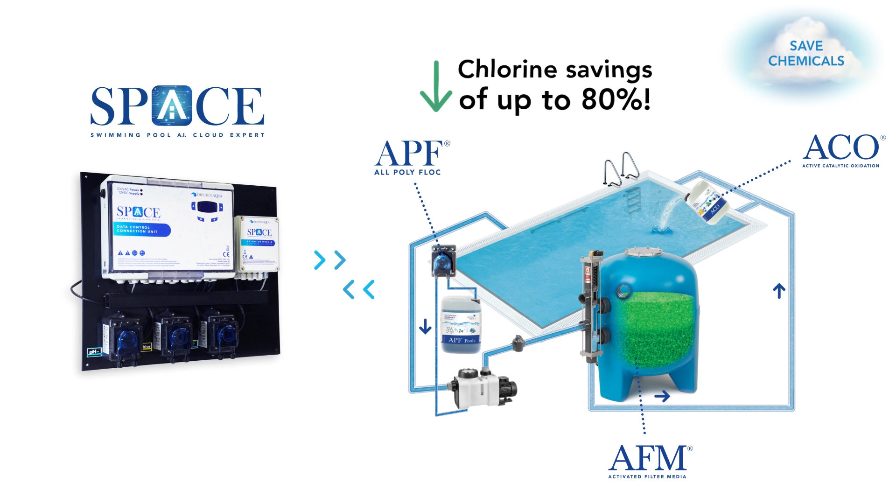Detect anomalies such as clogging, overpressure, and abnormal operating times, and automatically switch water filtration in overflow pools to stop evaporation and energy loss on cooler days. And to save chemicals, Space can be combined with DAISY, a unique biological approach that allows you to achieve optimal water and air quality with up to 80% less chlorine than a traditional system. Finally, with Space, your pool is always under control.

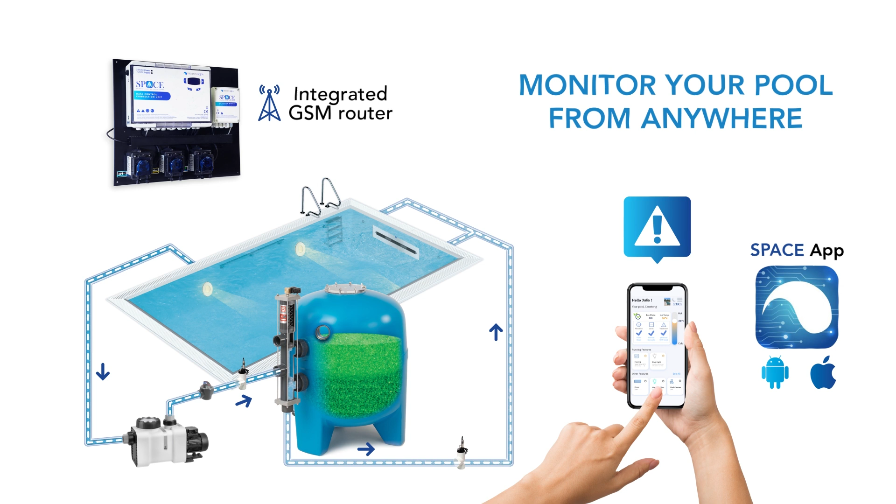Via the Space app, you can monitor your pool from anywhere, adjust its settings, receive notifications to plan its maintenance, or grant remote access to your pool specialist. This way, your pool is always kept in the best condition, whether you are at home or away. And all you have to do is enjoy a perfect pool. Space. Intelligence brought to your pool.

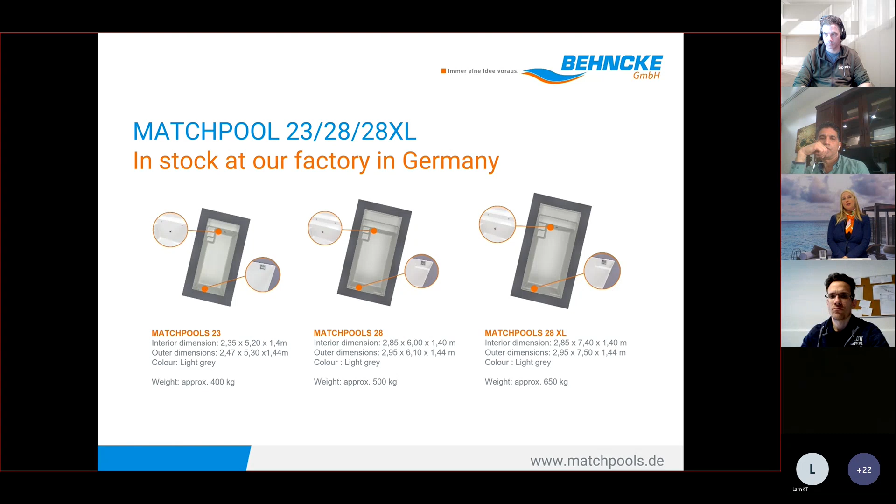Coming to the last product range, we also do have some pools, just in case you didn't know that. We're offering different sizes of the pool. And with this pool, we are delivering our inbuilt parts as already pre-manufactured, or you can also customize with our parts, as with the little box you've seen before. So it's like a plug and play, easy system, everything inside.

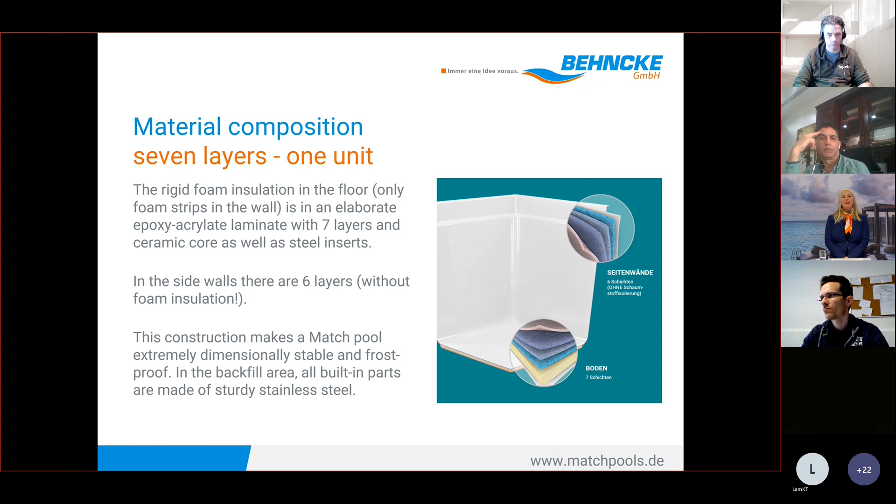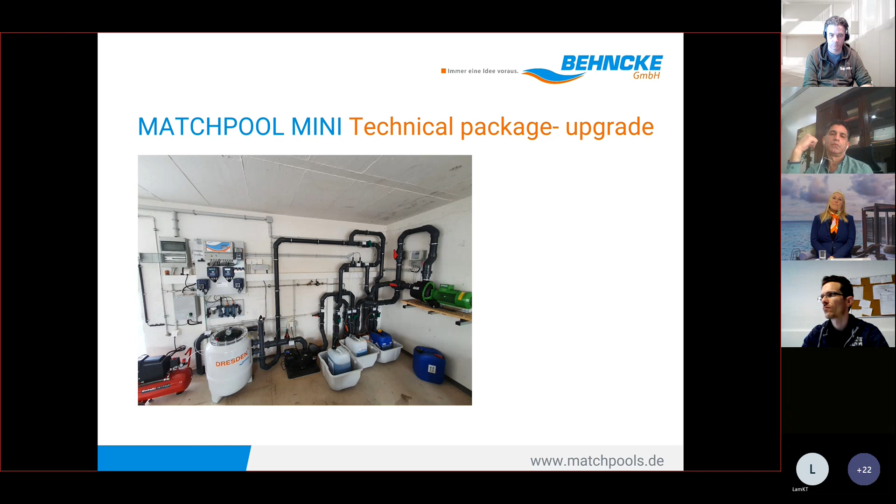And you probably already know our news - we've already had it about a year, I guess. The price list is all online. You can find a lot of videos if you like to have information on this price list.

And we are offering also packages, something we always can do, just to let you know. For example, if you'd like to have a filter, we put the valve and the filter material all together. You can have it as a package.

And yes, of course, that's very important - we do offer support. We have technical guys who can travel. And again, I say it again, you're very welcome to visit us.